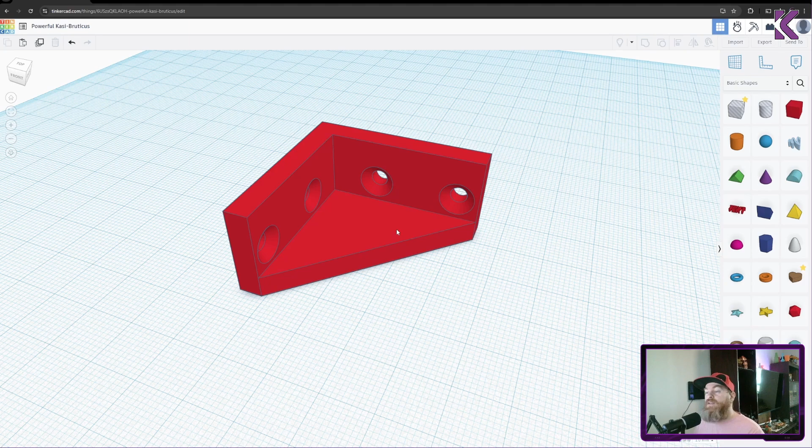So I'm going to put that aside, and we're going to build a new one. Like I just said, I have a sketch, and I took a picture of it so I can put it on screen and show you. Now I have my measurements, which is 40 by 40, and I want this wall right here to be 5.

So this is a 2D sketch, meaning I have drawn out 2 dimensions. But this is enough to give me all the measurements that I need: the width, the height, the length, etc.

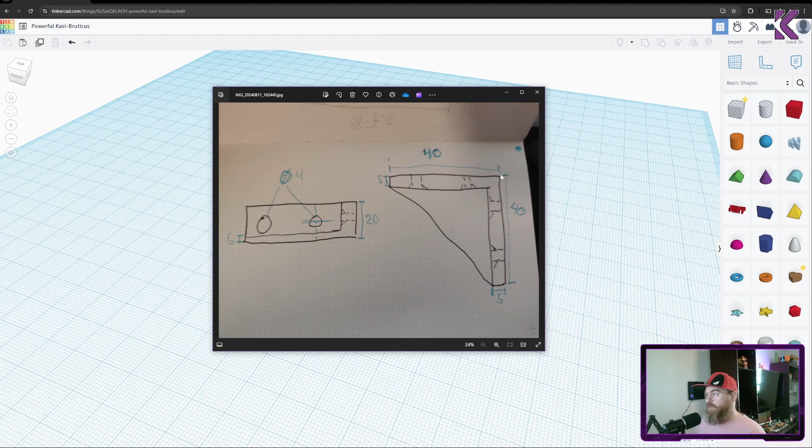Now, let's start by making this wall the main part of this bracket. It's going to be 5 by 40, and they're going to share this edge right here. So let's put that aside.

Let's drag in a block, and I'm just going to press one of these corners. I'm going to do 5, and then on this one, I'm going to do 40. The last measurement that we need is the total height, which is 20 millimeters, and this is already 20 millimeters. When you import it, it's always 20 by 20 by 20.

So this is one side of this guy.

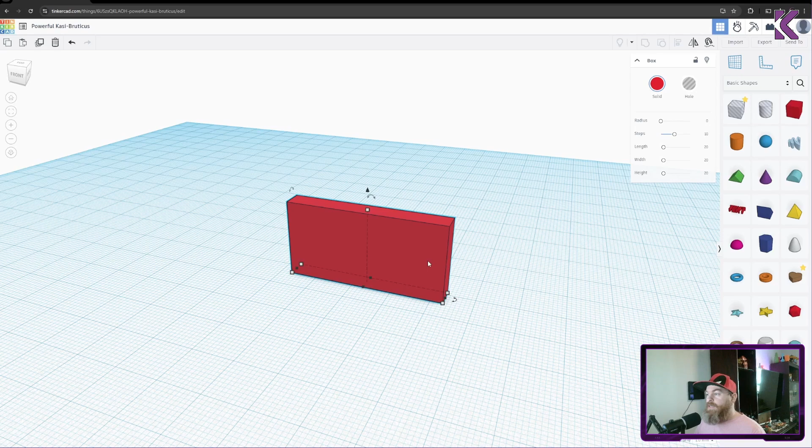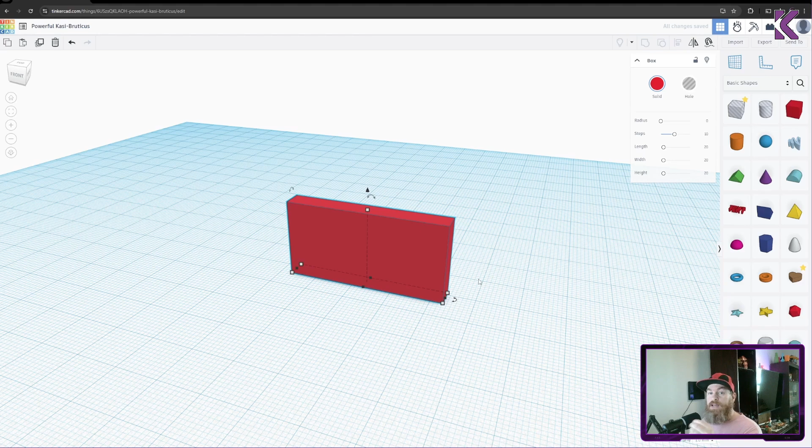So that's one side. Let's make another one. You could drag in another block and resize it to fit your needs. However, I have just what I need, so I'm just going to duplicate it. There's a button on the top left of the screen that says duplicate and repeat, so I'm just going to duplicate and repeat. It puts it exactly where the previous one was.

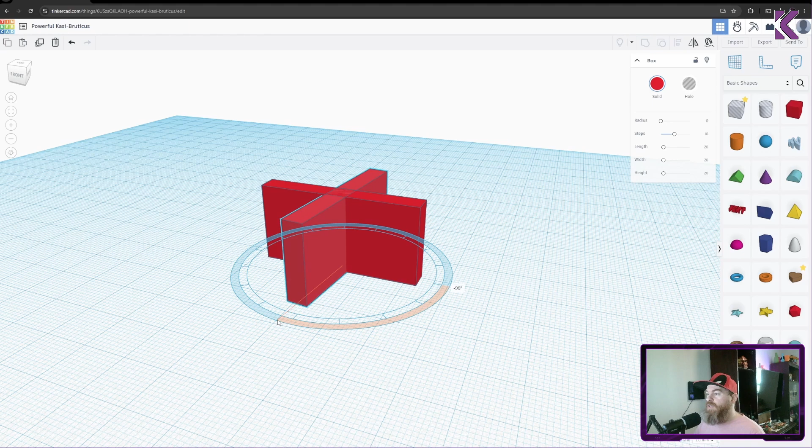So what I'm going to do is rotate this. Whenever you have an item selected, there is this little rotate symbol on each axis. I'll rotate that 90 degrees, and note that if you go on the outside of this circle, there are a lot of controls, and the different circles give you different resolutions. So I'll set these to 90.

All right, so I have two of the sides, but they're not where they're supposed to be. You could just start moving things and try to line them up, but we don't need to do that.

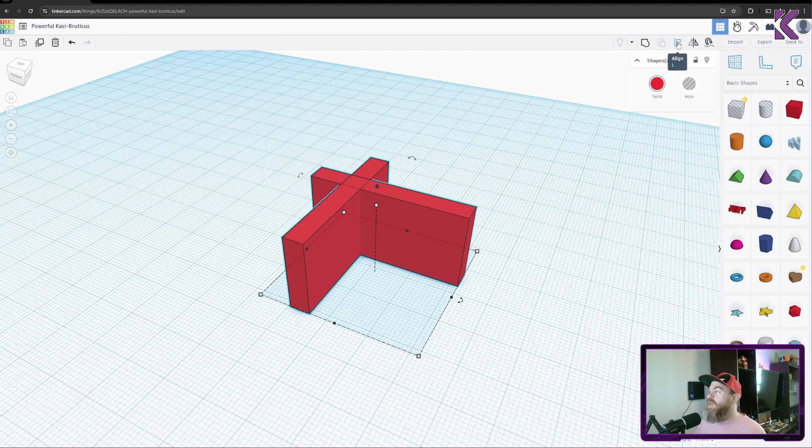So let's drag select all of them, and go up to the top right and hit this align symbol. I want to have these two corners meet, so I'll press this button right here and this button right here. And now they're connected, or aligned where they're supposed to be.

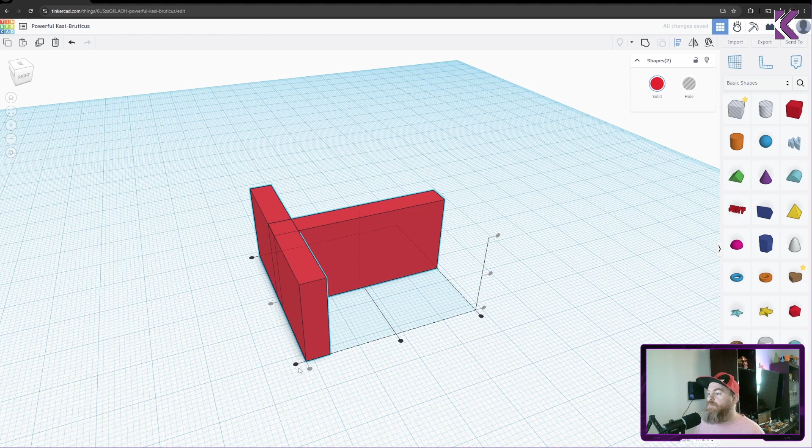If I wanted these to align in a different way, I can use the same tool, just by pressing different points.

Okay, so let's make this into one part, because now it's two parts. So I'll make it into one part by selecting both and then go up here to group. And that makes it into one part.

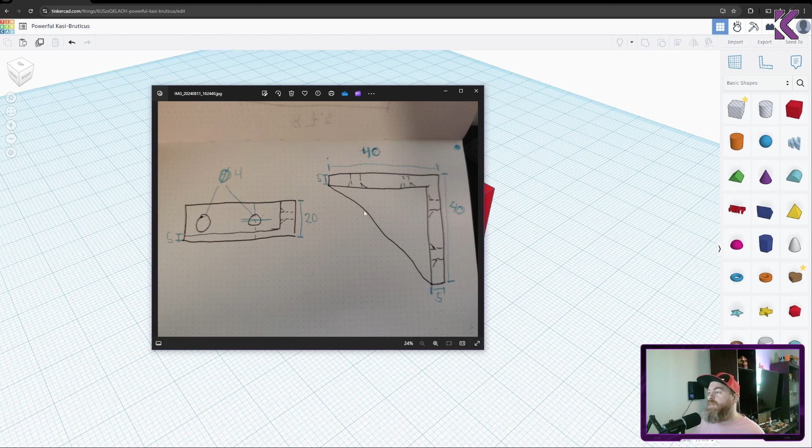Now, next item is the flat part, so it's this triangle bit. This is there to reinforce the joint. This angle bracket by itself in plastic is not so strong.

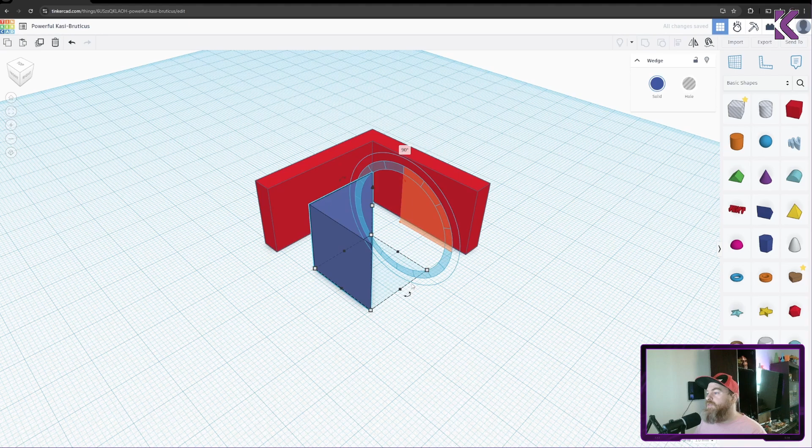So let's just grab a triangle, and you can probably see it's the wrong way. So I'll rotate it 90 degrees that way, and then 90 degrees that way. And we already know the size of this.

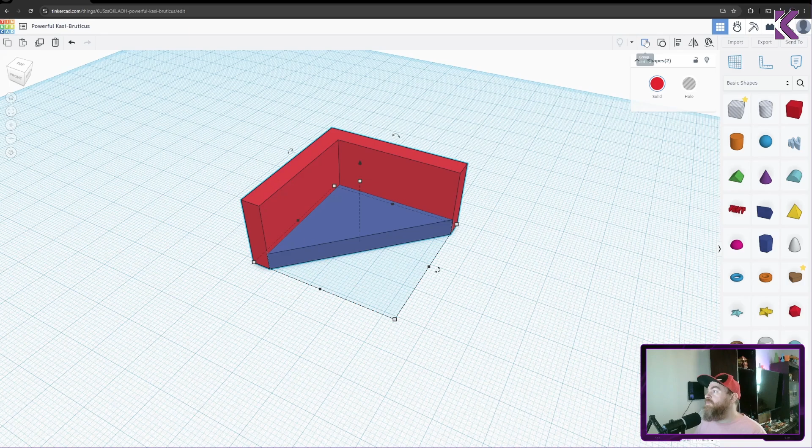So what I'm going to do is get this lined up, and I'll just drag it out, because this is 35 by 35. And there we go, they have been aligned. So I can now select all of these, go back to group, and we have an angle.

And now comes the part where it's not straightforward. We're going to make the holes for the bolts. One of the limitations of TinkerCAD is that you cannot chamfer your models.

You'll have to model the chamfer into whatever you're doing. As you can see, I've made chamfers because the screws I'm using have chamfered profiles. I've done this for years and years, and it's always been working for me.

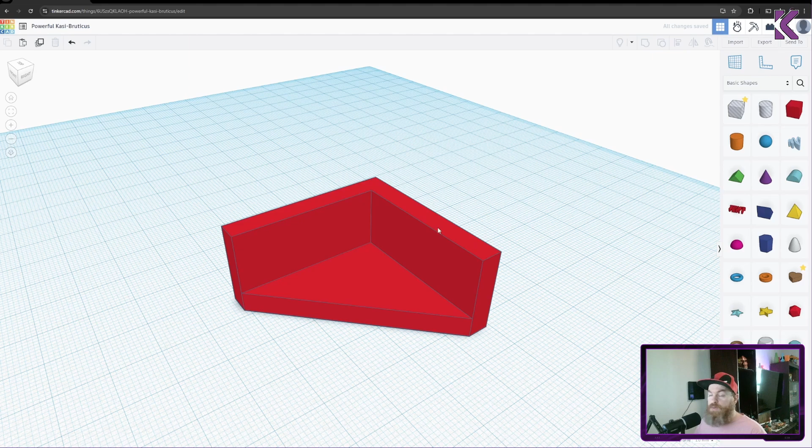What I'm going to do is start by grabbing a cylinder and making it the size of the hole. I'm not too concerned about the length of this, I'm only concerned about the thickness. In this case, it's 4 millimeters, so I'll make a 4x4 cylinder.

And then I'll grab another cylinder and make that bigger. Usually in this case, I'll do 8, so I'll do double the size of my hole. That's just what I've been doing. It's been working, this is not based on anything, it's just my experience.

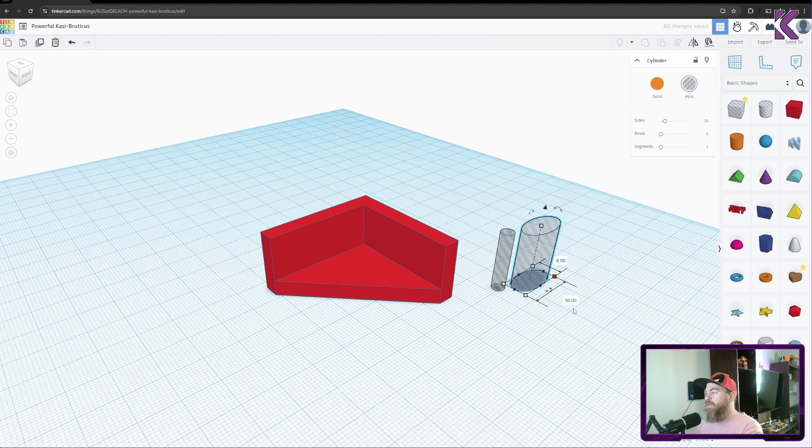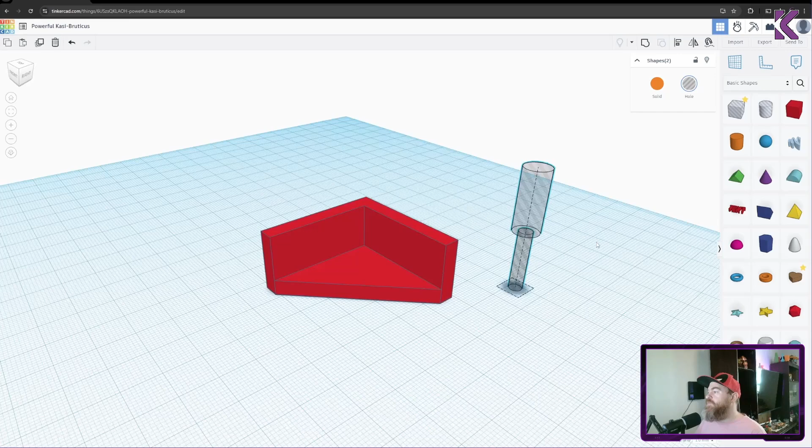So I'll make that 8 by 8, and then I'll use this align tool again to align these two into each other. And then I'll pull the larger one up so that it's 20 millimeters higher, creating this odd shape, I guess. I'll group that.

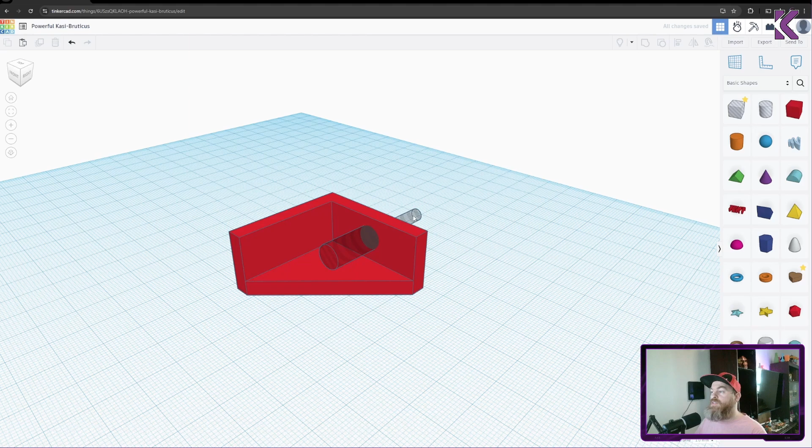Now I could use this and get inset holes. So if you're using machine screws that have flat profiles, you could grab this and put it into your part. And if I now select all and then group, because this is a negative part, it's going to make a hole in the positive part, and we get this nice looking hole. So if you're doing machine screws, this is what you would do.

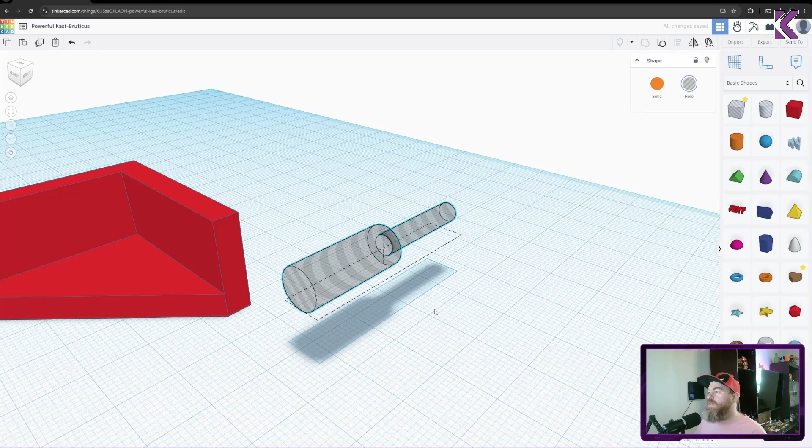And I'm going to ungroup this again, and I'll pull this aside so that I can do some more stuff to it. Now what I'll do is set it back up to 90. I just prefer to work in this orientation, I'm not sure why, it's just my preference.

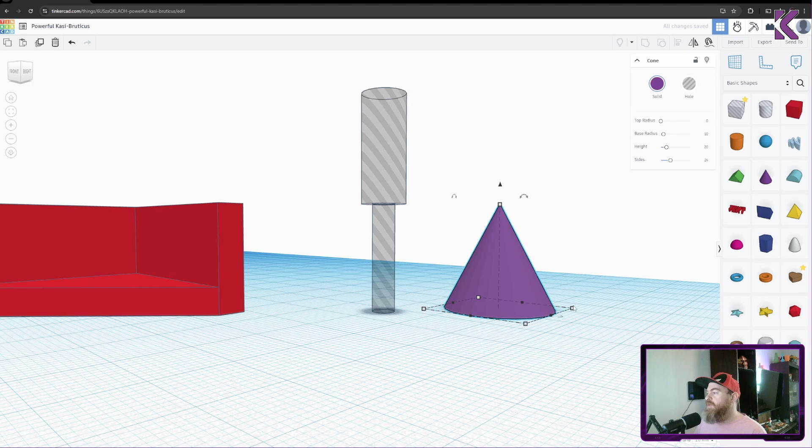And what I want to do is chamfer this. Now you could start measuring angles, but I'm not too worried about that, so I'll just make this 8. I've just pulled out a cone, so I'll make that 8 by 8. And then usually I'll do half of the height that I need, so in this case, the height is 4, and I'll do 2.

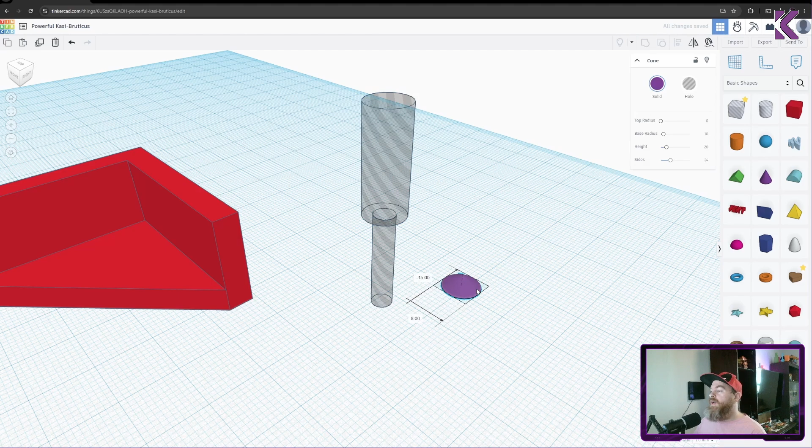That looks a little low, so I'll do 3. And because this is now a positive, I cannot put this in here and then duplicate, because that will just make a hole in the positive one. So I'll grab this and go into this. You can select colors for different parts, but you can also just convert any solid into a hole.

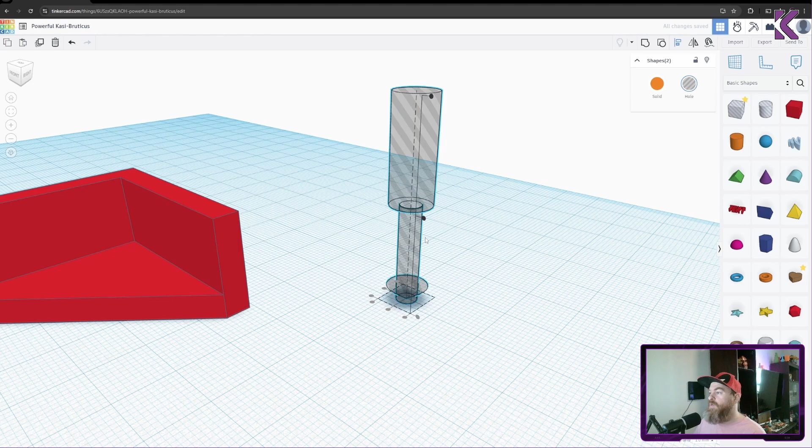And now I have my hole, so I'll flip it upside down, and then I'll align it again. And I want this to be in the middle, and luckily there's a tool for that. And usually this is what happens, it just gets caught.

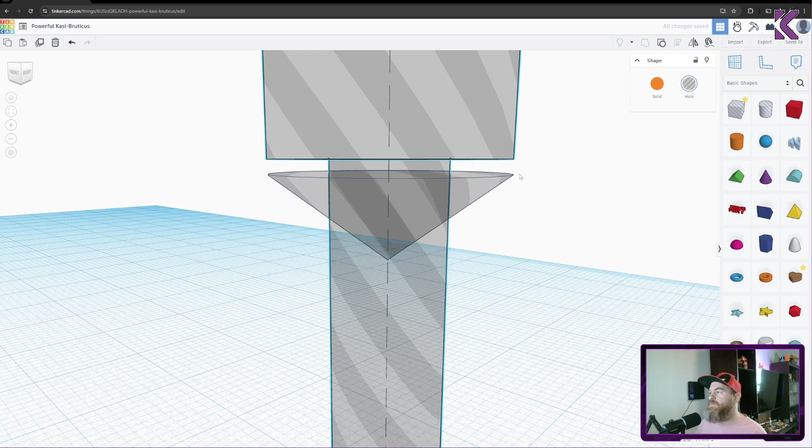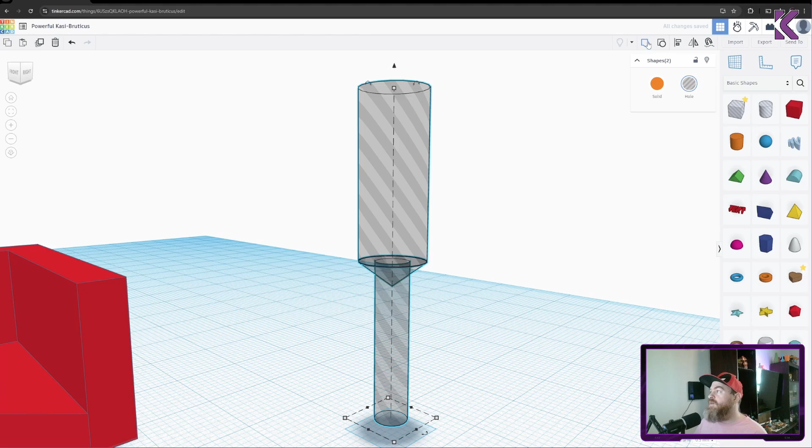Slightly, because it's in the middle. So I'll just pull this big part up, and you can see there's a gap. And if I try to go down, it goes too far. We can fix that quite easily by going down to the right. There is a snap grid, and if I set that to 0.5 instead of 1, I can move this in half millimeter increments. Now select all of that and group it, and I have a nice little cylinder.

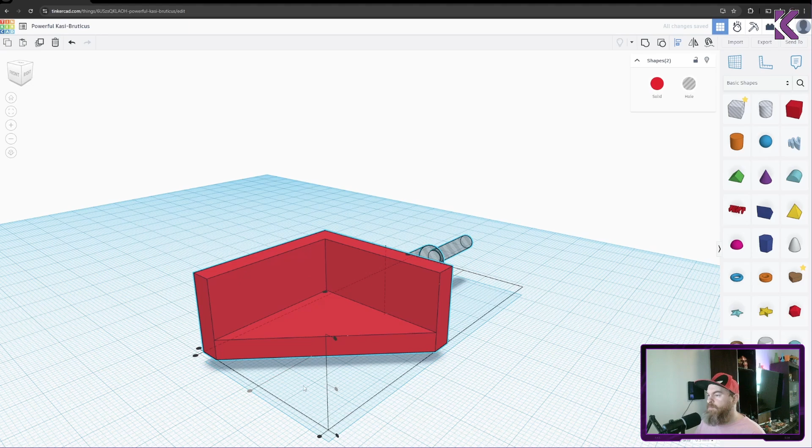So next would be to put this onto my model. I'll rotate it, and then I'll just select all and use the align tool once again. And I'll put it in the middle. Right now I'm just roughly putting everything together.

So I have the hole in the middle, and for a part like this, I'm not too worried about the placement of these holes. As long as they're inside of the part, I'll be happy. Tinkercad doesn't really have that super precision without counting individual moves. So what I'll do is I'll pull it into roughly where I want it, and in this case, I want 2 of them.

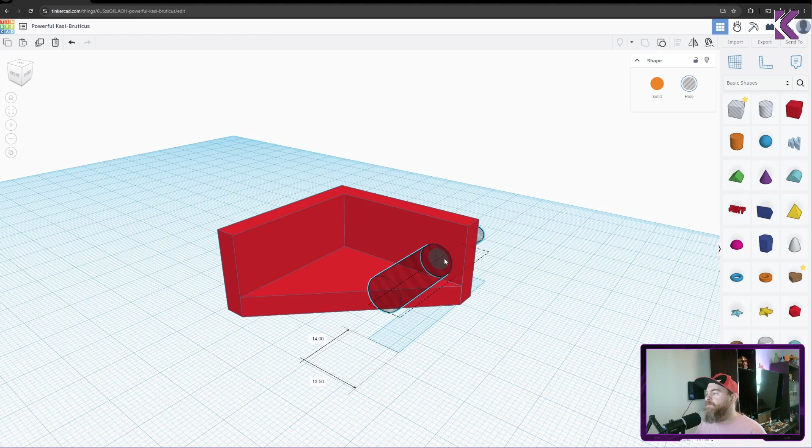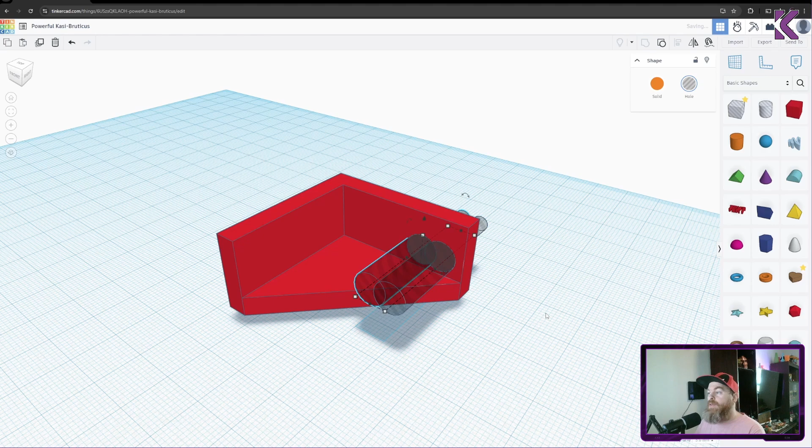So I'll put one there, and then I'll push duplicate and repeat. What I'll do is I'll change my snap grid to 5, and I'll just press my keyboard, the arrow button. Each time I press it, it moves the part 5 millimeters. And there you go, I had to push it 4 times, so that's 20 millimeters between those 2 holes.

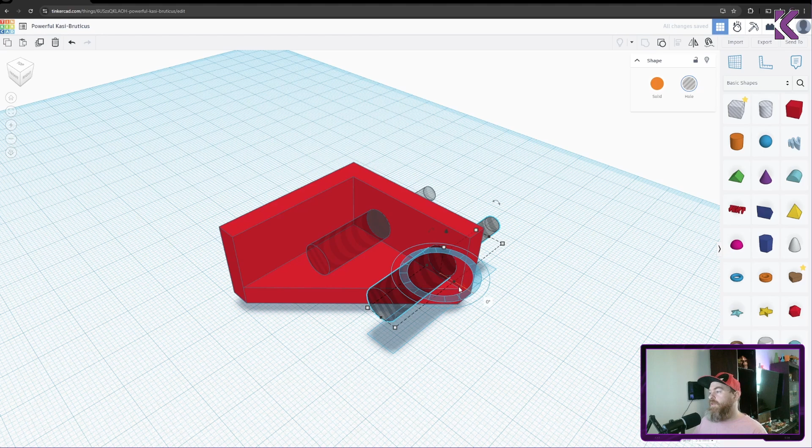So what I'll do is I'll duplicate one of these using the duplicate function, or just press Ctrl plus D on your keyboard, and then I'll turn it 90 degrees. I'll put my snap grid back to 1, and then I'll move this to roughly where I want it. In this case, this doesn't really matter. If I wanted this to really be precise, I would use my keyboard to get it aligned, the center line right here, aligned to the edge.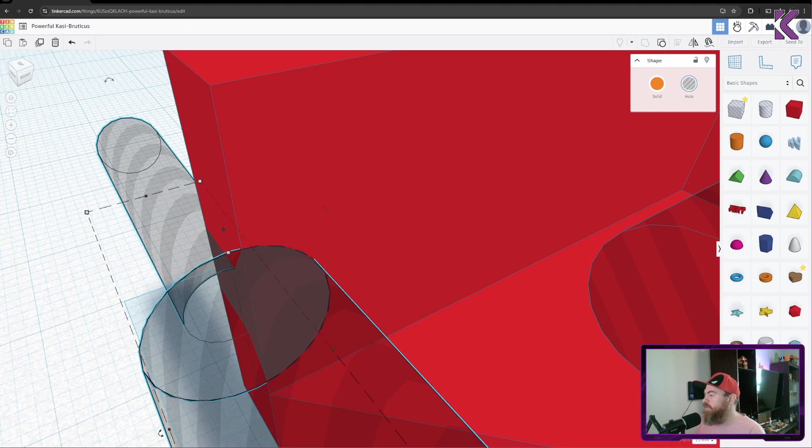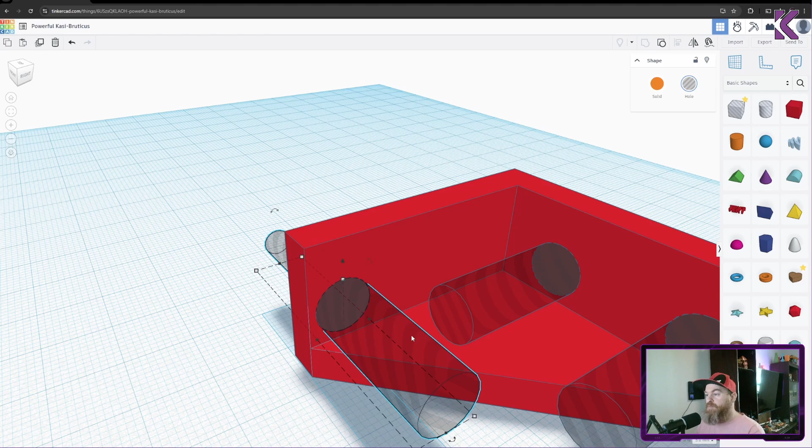So I had to put it like that, and then I would simply count. So I know the hole is 4 millimeters, and the big part of the hole is 8 millimeters, and I want it at least 4 millimeters in, but I would want something more on the edge. So I'll put 5 and just press the keyboard, and it's 5 millimeters in. I can change that to 1 and go 1 more.

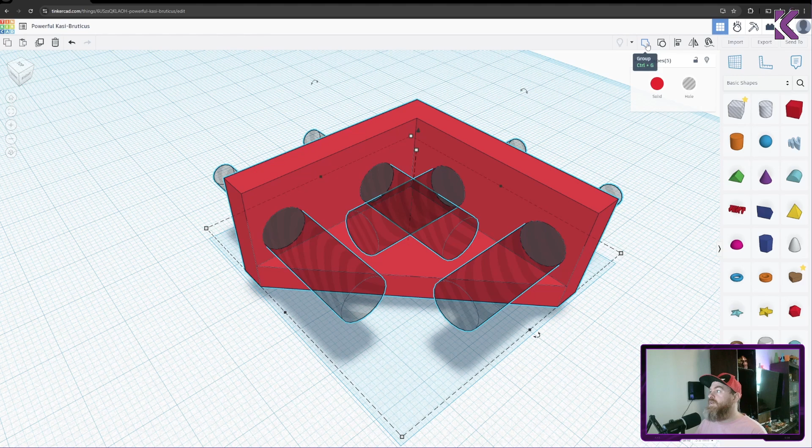Now I'll duplicate this, I'll put it back to 5. And there you go, all of the holes are on. I'll just drag and select everything and then group, and I have my part. You could place it back down on the ground, doesn't really matter that much, but there you have it.

Both of my parts, they're almost identical. If you can spot the difference, let me know down in the comments.

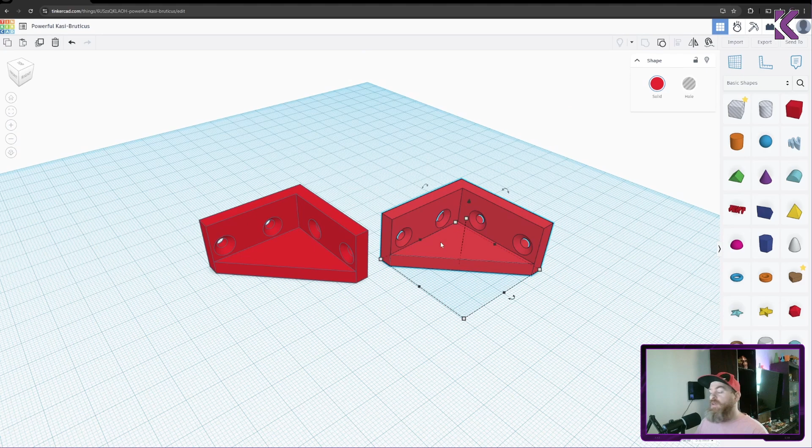And all we need to do now is export. So I'll select the part, press export. In this case, an STL is more than enough. Make sure that it's on the selected shape, and it'll download into your browser's download folder, and you're ready to print.

And there you go, the little brackets came out great. They do what they need to do, and what more can you ask for? This is fairly simple to do, and I hope that with the little bit of information that I showed you in this little tutorial, you'll be able to make things for yourself or for friends around the house.